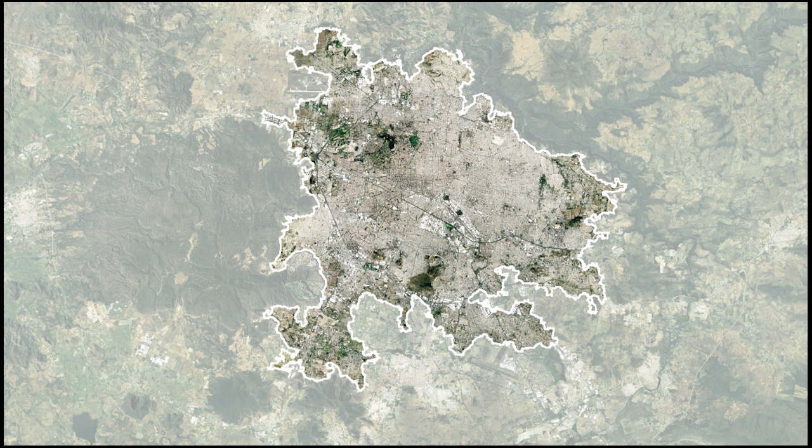Between worlds: approaching strategies to integrate urban fragments. We start with the simple word fragment, an irregular piece or a broken line, a disconnection between urban spaces, between realities and experiences of a city like Guadalajara.

The cultural importance of the city lies in being one of the metropolises with one of the richest cultural movements in America, with a vast agenda that exploits the attributes of the city, being the center and headquarters of international artistic encounters and renowned audiovisual exhibitions.

On the other hand, Huentitan, which is the only non-urban area, is the natural heritage of the municipality, with its ravine, fauna and flora.

Architecturally, the importance is in its more than 2,000 colonies that reflect the European style of the 19th century with its colonial renown, and in the modernization that the technology and trends of the 21st century have brought.

It is worth highlighting Guadalajara's rich biodiversity and culture, and the development it has had in recent years.

Guadalajara's urban growth started within the settlement around streams, and further, it adapted to the Spanish colonial grid. After understanding how the city developed, we could conclude that the last 20 years of settlement expansion had taken place towards La Barranca and its surroundings.

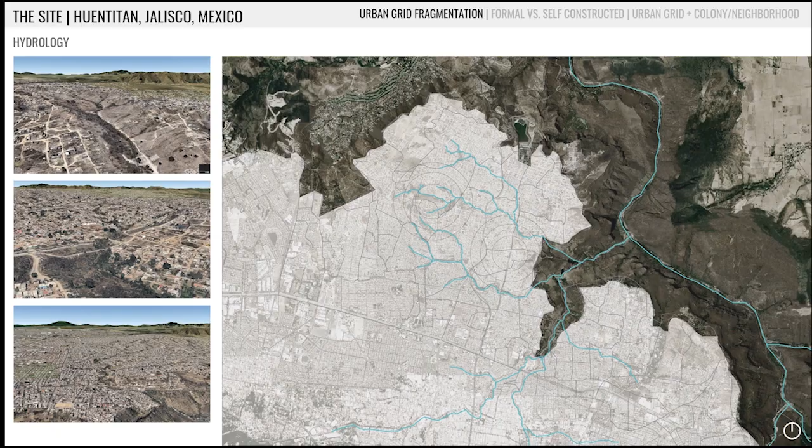Throughout the complex hydrological system of the place and following the path of Huentitan's main river, one of the settlements that we know today as Huentitan and Zapopan was developed.

In these places, the most relevant topographical accident is the barranca. Nevertheless, it is also possible to identify a sequence of topographic variations through the Zapopan sector that characterize the place.

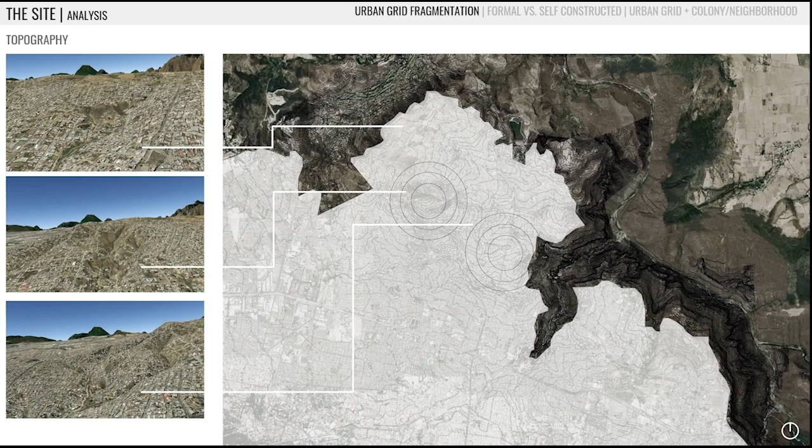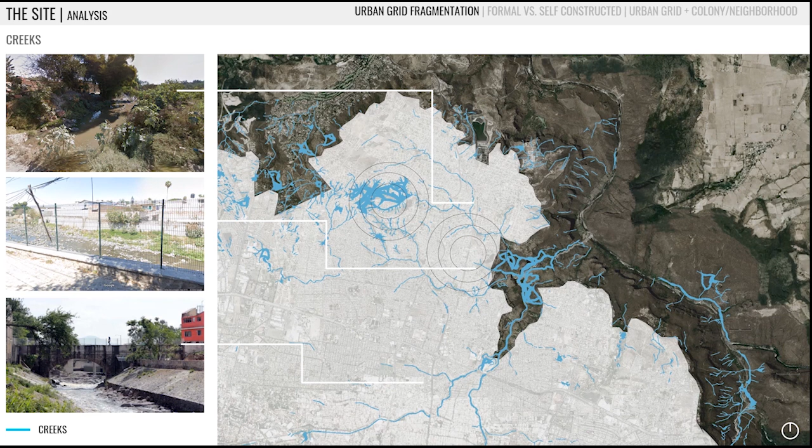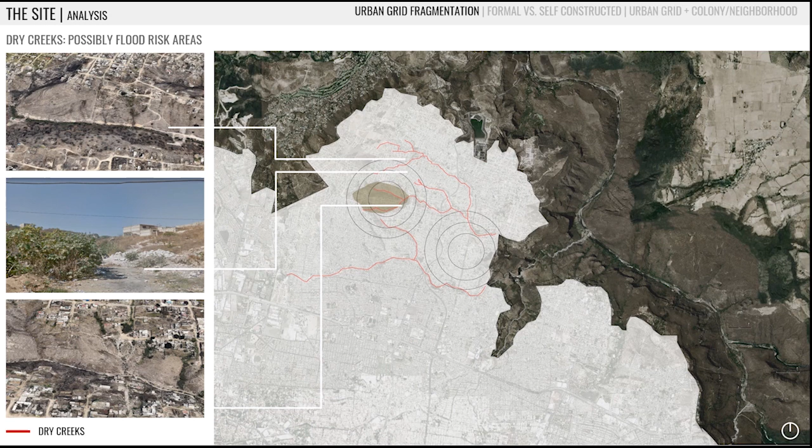Another important characteristic is the presence of streams, associated mostly with risk zones and at the same time as communication barriers. In addition to those that have a constant water flow, there are also dry streams where in certain sectors they are used as communication routes, but then they are exposed to possible floods and landslides in the periods of rain.

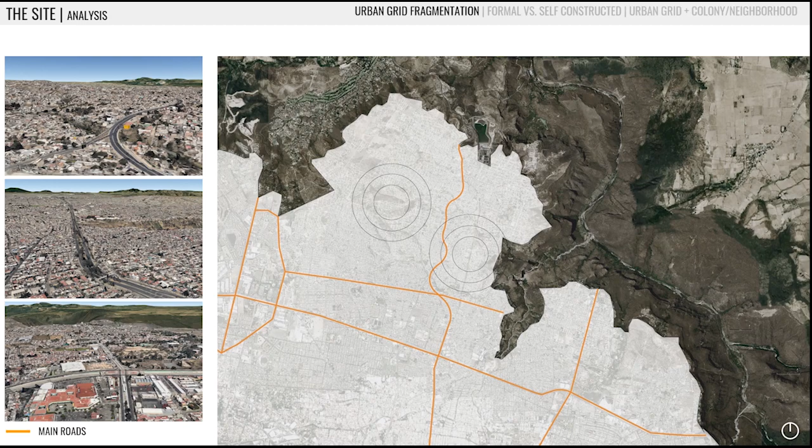We continue the analysis of the main roads and how they cross over the sector. Additionally, the main metropolitan green spaces are identified, such as the zoo and the Centinela Forest.

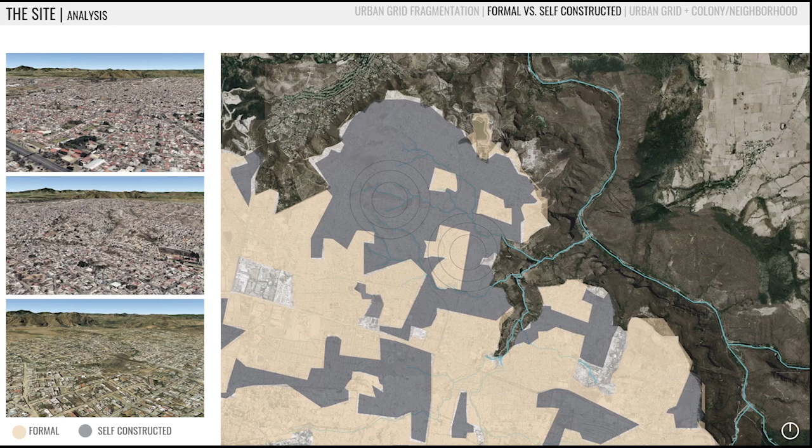Lastly, analyzing the actual urban grid, we figured out that it doesn't correspond in its entirety to the conformation of the colonies. So it was possible to identify a coincidence which includes the ruptures within the grid and the limits between one colony and another.

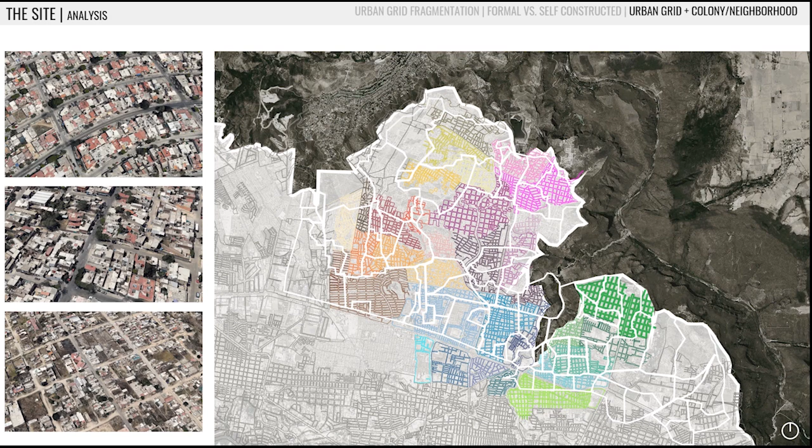The ruptures have become barriers within the community, creating boundaries and isolating the different colonies because of the lack of connection. So for us, these empty lands are considered as the potential areas for a network of connections that bring the barranca into the urban grid and integrate the different elements that conform the city.

A reading of the metropolitan scale allows us to select testing areas that can help us enhance the replicability of strategies and obtain the integration between the urban fragments, mostly the colonies and programmed and self-constructed settlements.

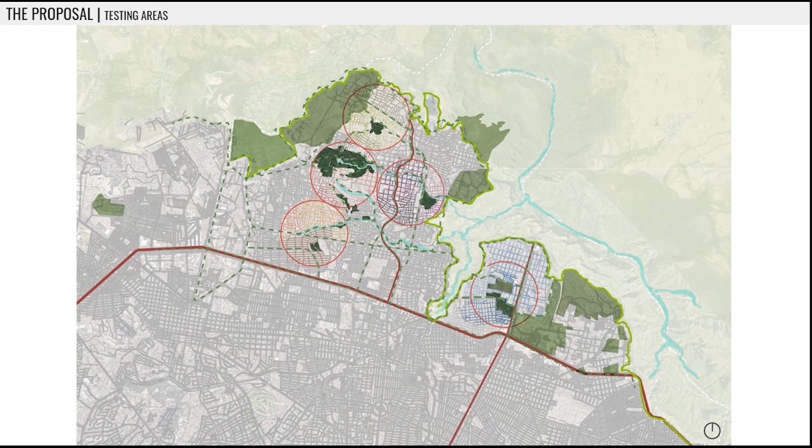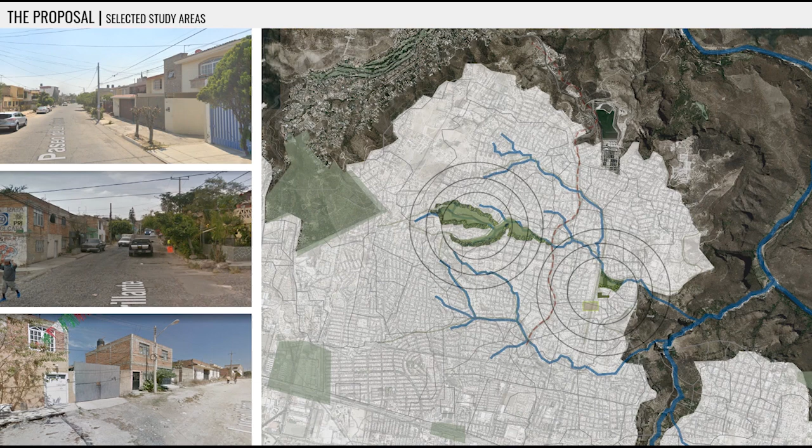Specifically, in Zapopan, we selected the testing areas in which are present dried creeks, abrupt topography, and infrastructure that act as boundaries between two sides of the city.

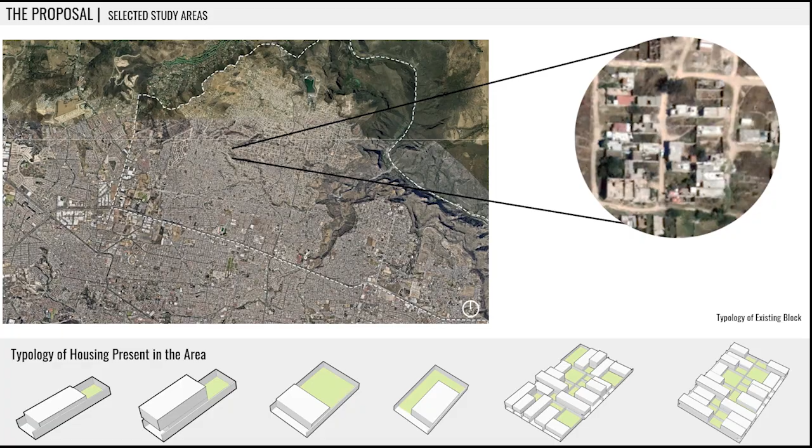Within the sector, we identified the following housing typology and block conformation, predominating the distribution with backyard and separation by dividing walls. In order to reconnect these city fragments, there must be a developed connection system, including transportation routes, corridors between urban green spaces, and creek rehabilitation, trying to keep a holistic view within the urban grid and the rupture integration for further replicability.

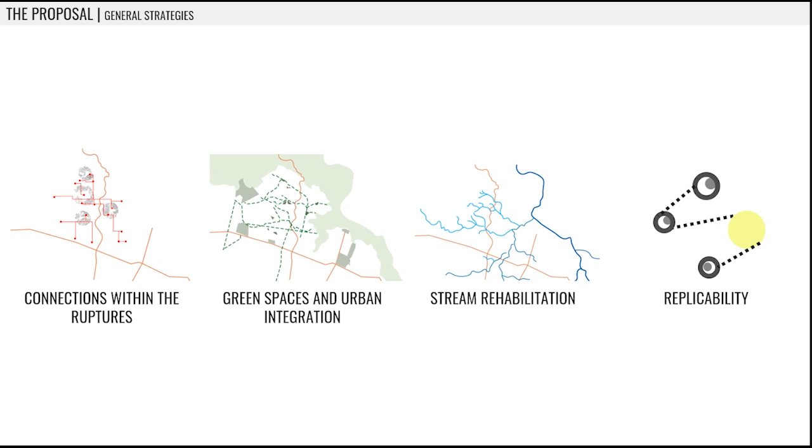The green armatures analysis allows us to identify the main intervention areas. For areas that appear to be more consolidated, central transformative fields were proposed to improve the quality of the settlements and boost the economy and tourism of the region.

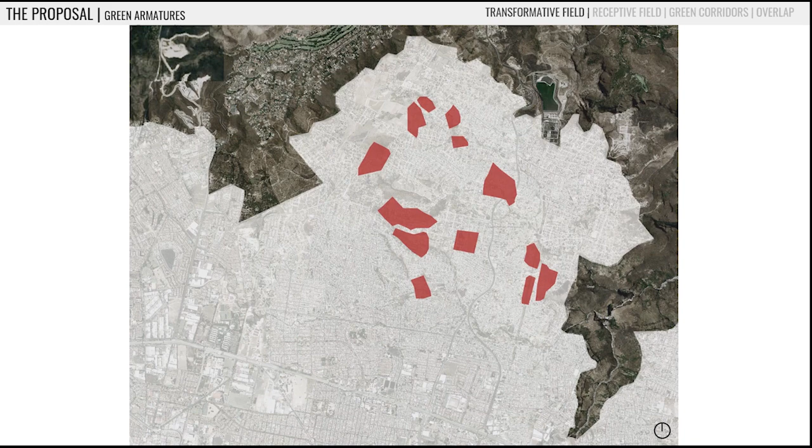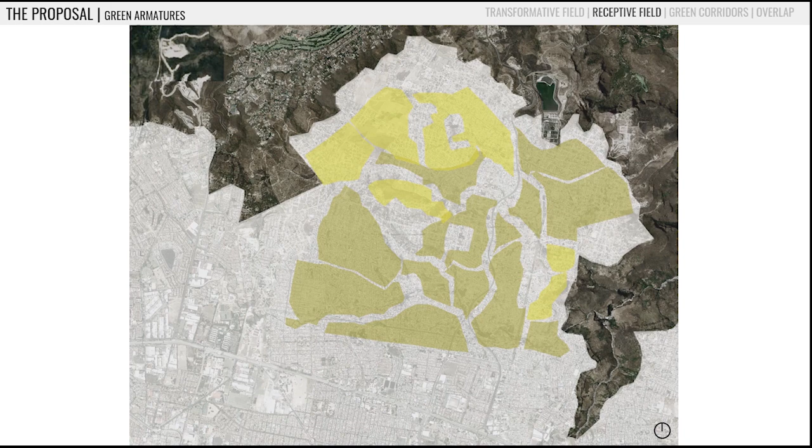On the other side, receptive fields were proposed in less consolidated areas, including actual empty lots, to allow the new settlements to come in. These fields were all integrated by a network of corridors that are meant to attract activities into the area.

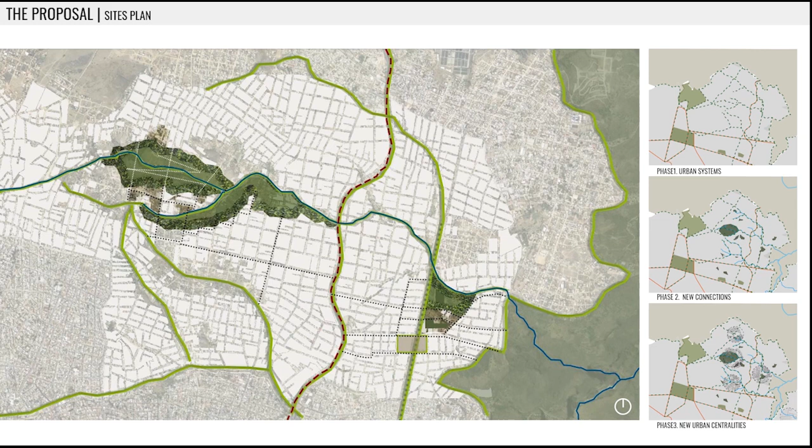Once the study areas have been defined, it is thought to take advantage of the natural character of both sectors and use it to generate new connections to integrate the vegetation of the canyon to the rest of the city.

The first intervention sector is characterized mainly by the presence of topography and former creeks that are currently dry and tend to fill up within the rainy periods, turning these lands into possible risk zones for self-constructed settlements.

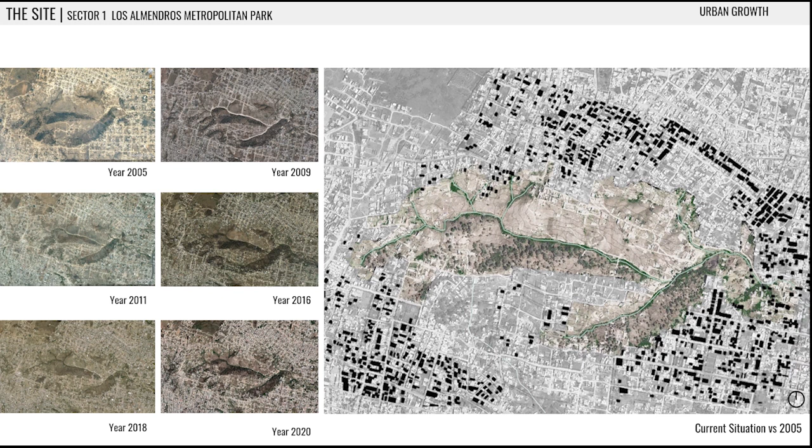This is why we decided to study the urban growth of the site, in which we can appreciate that since 2005, self-constructed settlements have started to appropriate the empty space despite the rough terrain and the presence of vegetation.

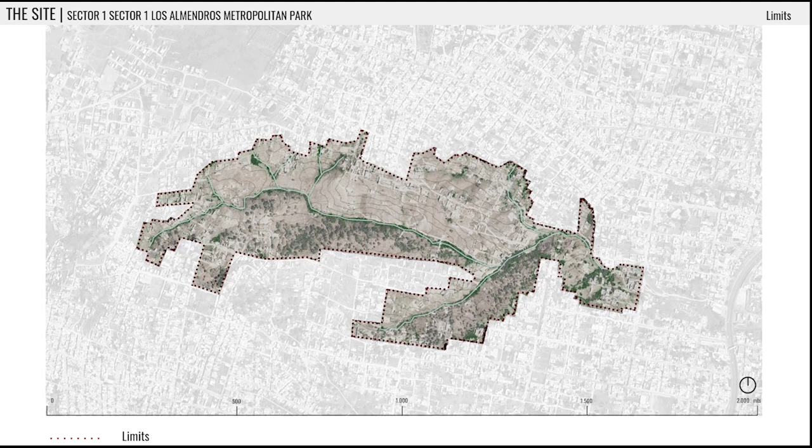To comprehend better the extension of this rupture, we proceeded with a series of analyses where we could identify the limits of this fracture. Here we can appreciate the vehicle roads that surround the site and the pedestrian paths that were made spontaneously by the locals over the years.

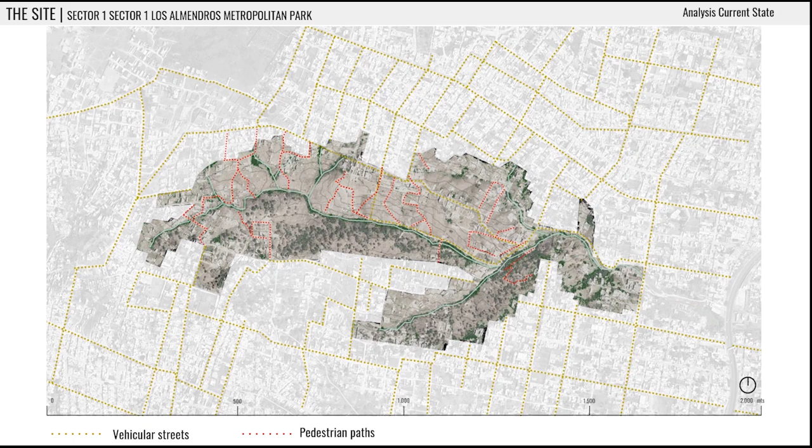It's because of this analysis that we noted that there's an intention to connect both sides of the canyon. However, the paths that currently exist do not allow such connections.

After defining the limits of the rupture, we've categorized the green areas into green protected areas inside the rupture and semi-occupied areas, realizing that there was a greater presence of vegetation on the south side of the canyon.

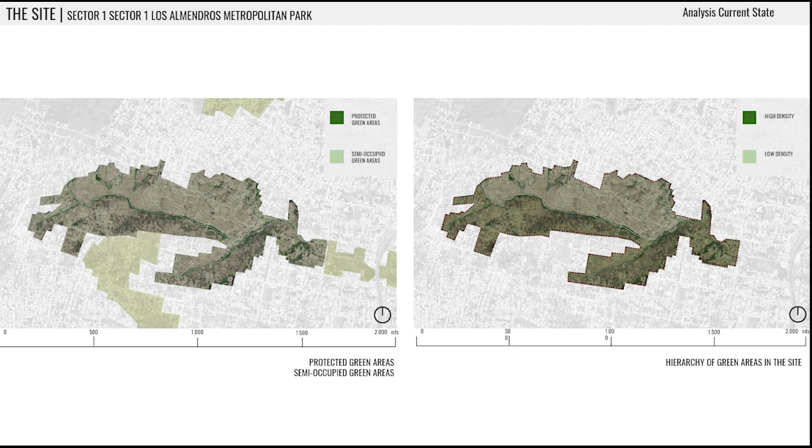Finally, we identified the main existing connections and thus noticed that some of these roads branch into the rupture, penetrating the boundaries between the city and the protected green area.

In this sense, we can also appreciate that the growth of these settlements stops abruptly in some areas, but in others it slowly merges into the canyon.

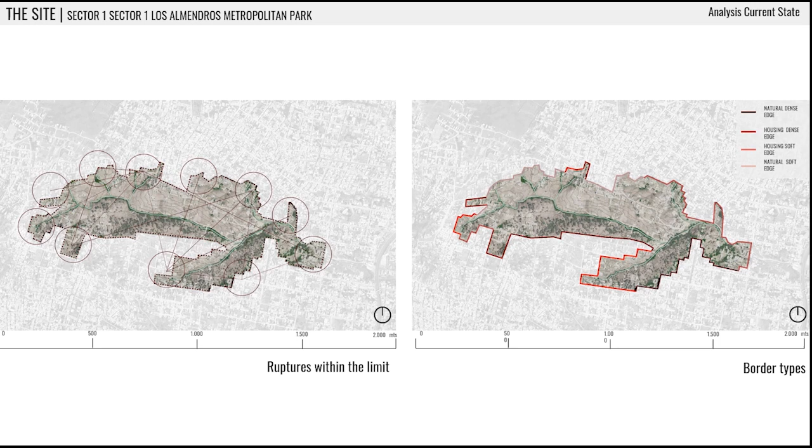This way, defining soft limits and hard limits, leading us to identify a sectorization that qualifies the unused space and thus the urban relations. This way, the proposal is structured on the definition of green areas.

We seek to become a mechanism through which protected areas can be created, allowing creeks and land to be rehabilitated.

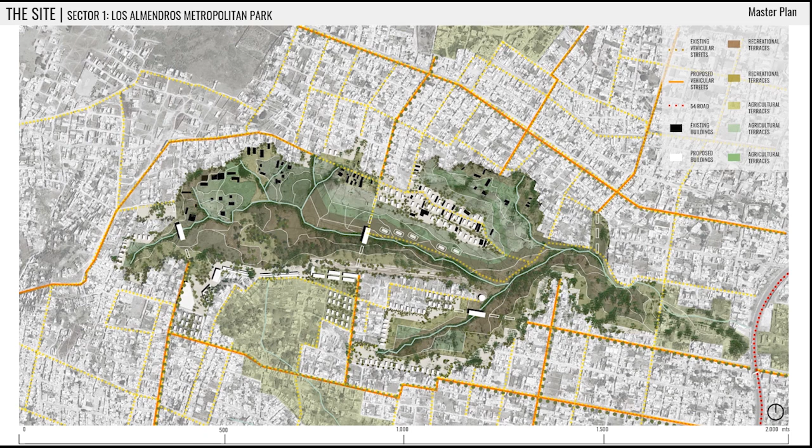This way, Los Almendros Metropolitan Park will allow the connections between the colonies and its surroundings, through different types of connectivity systems which allow it to integrate to the park within its limits as well as with the rest of the city.

Through green and mobility corridors, the proposal seeks to integrate the vegetation and the nature to the rest of the urban grid, taking advantage of the empty lots to define a new organization in which self-constructed housing can be developed.

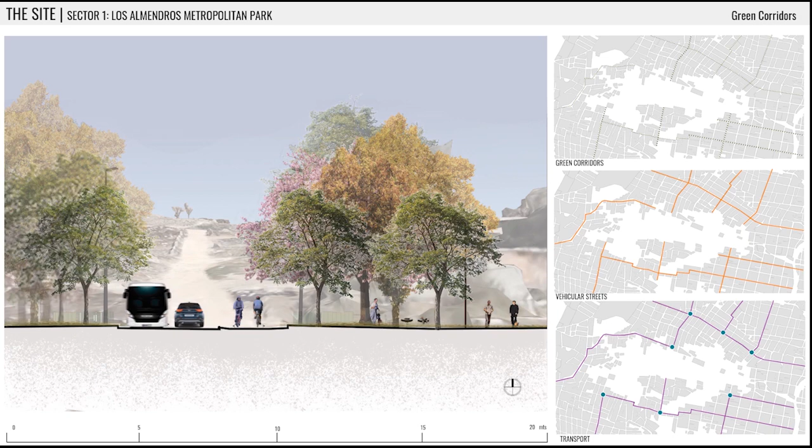The proposal seeks to integrate the existing housing typology by establishing an order that allows the creation of new self-constructed housing in the site, focusing on the integration of the urban grid with the limits of the rupture and the creation of new urban facilities that can promote the social and cultural integration.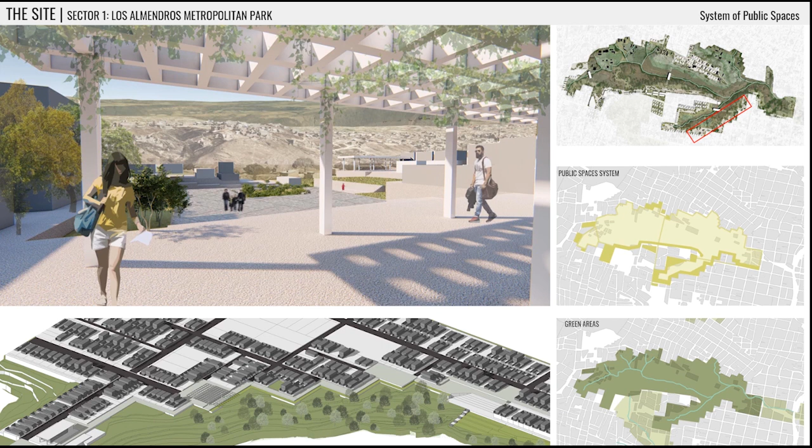The more defined limits are taken as an advantage to create intermediate scale zones between the homes and the new metropolitan park, which allow the community to enjoy spaces that are more friendly to the family environment and to the everyday life.

Then, in the less dense limits, there is the opportunity to establish new urban facilities of an economic and cultural nature that, in addition to serving the community and serving for its integration, they become a transition between the metropolitan park and the urban grid.

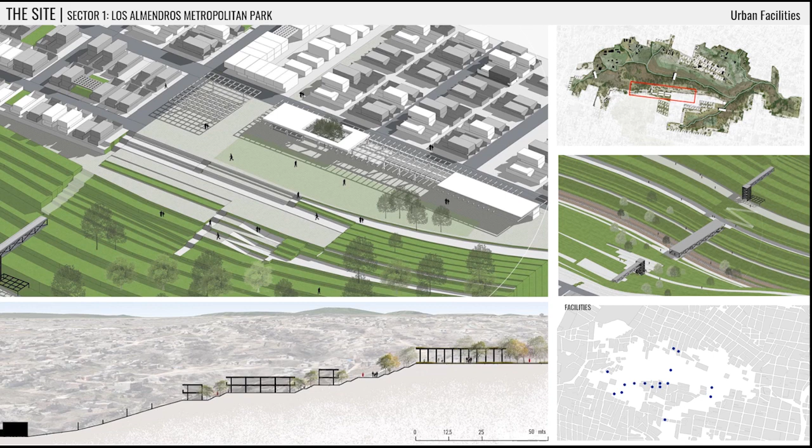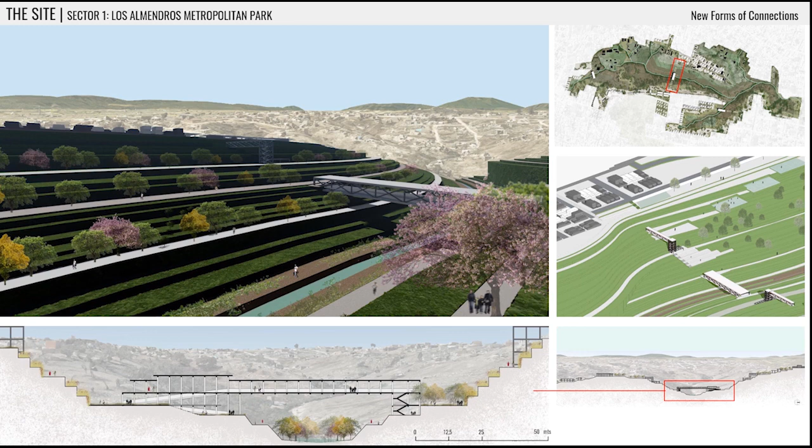Because one of the main objectives of the proposal is to generate new forms of connection, a new system of bridges and stairs will be created to connect both sides of the canyon, where people were already seeking to travel. Likewise, these elements are not only provided as connectors, but also as urban facilities that provide services within the park for the community.

Because of its topography, sloping land is proposed as agricultural terraces, to boost local production and reduce the growth of settlements in an uncontrolled way, by including public spaces and urban facilities for the community, consolidating a transitional space between the existing housing and the canyon area.

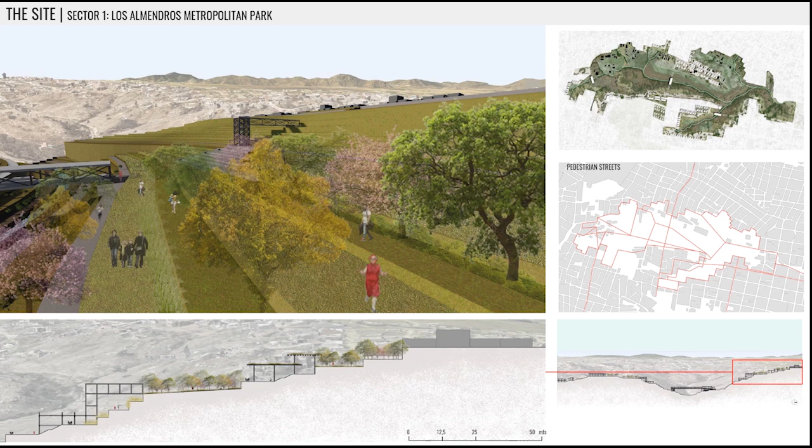In search of more effective connections, a structure that generates faster connectivity is proposed, prepared with facilities, formalizing a more dynamic route that alternates terraces, paths, and slopes.

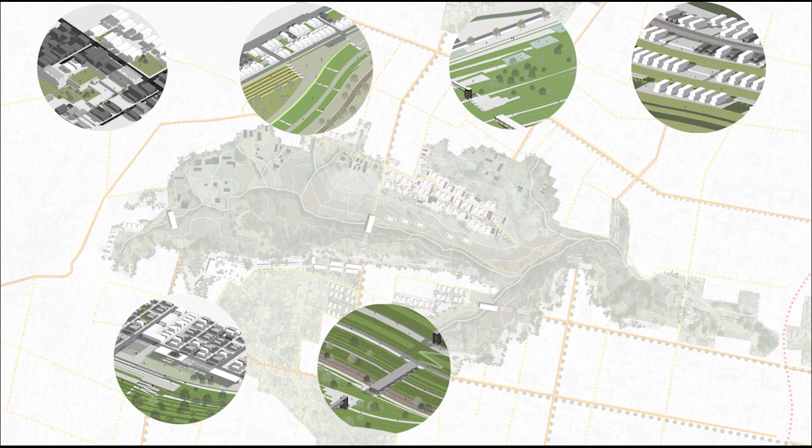Finally, the typologies used for the conformation of Los Almendros Metropolitan Park that seek to integrate the fragmented spaces within the city are shown, redefining the interstitial spaces and thus generating a new centrality.

The second intervention sector we named the Zapopan Lineal Park. It is characterized by the presence of the aqueduct, a creek, empty lots, a neighborhood center, church, vecinal sport field, and the limits within the border of the barranca.

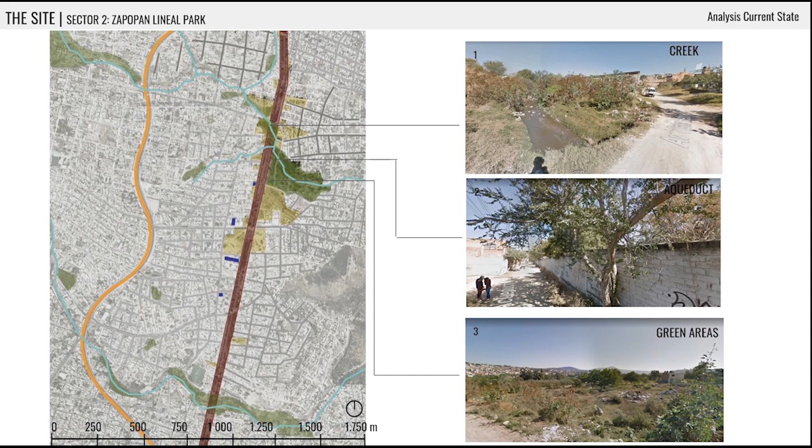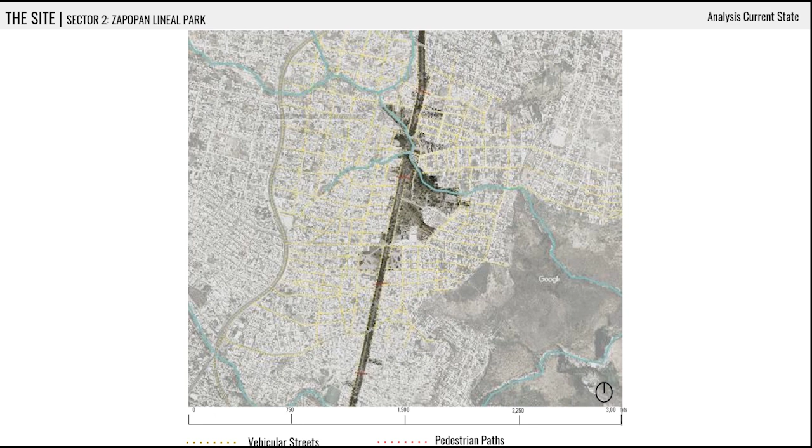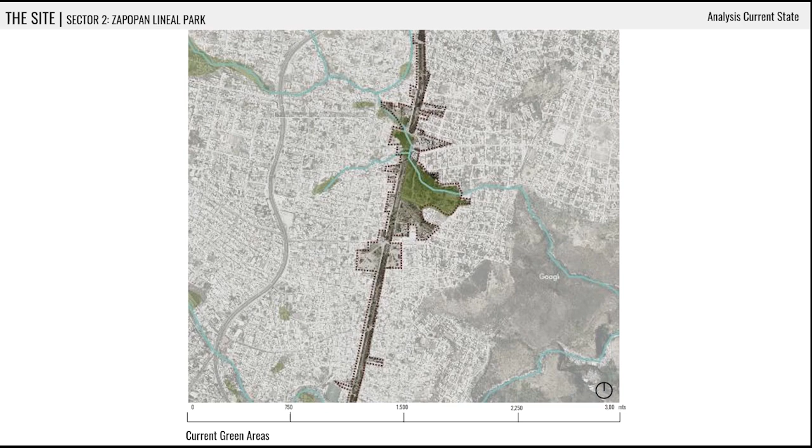We proceeded with the sector analysis starting with its limits regarding the aqueduct and the empty spaces. Then looked at the road system and the current transversal connections, and also located the pedestrian ones, observing some existing pedestrian passages that cross east-west. Both were overlapped, and we watched how the current green areas surrounding the infrastructure that divides both sides of the sector is directly related to a creek.

Also, it is important to analyze the ruptures within the limits, characterized mostly as empty lots with subused features, some near the stream and others bordering the aqueduct, and the border types, so we could identify which were soft for further intervention and which were hard.

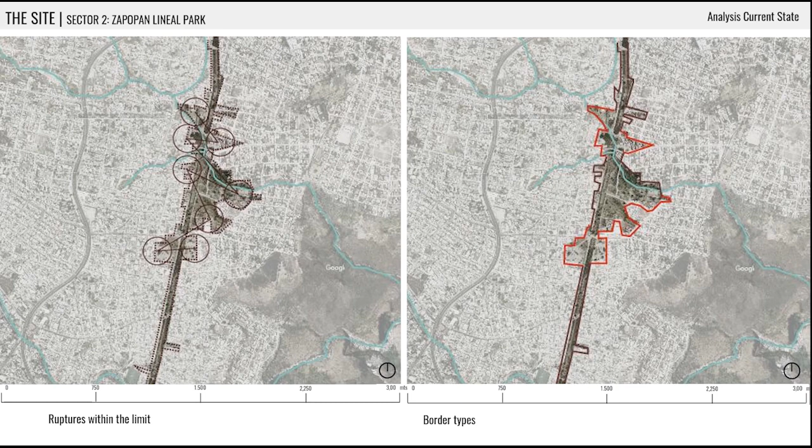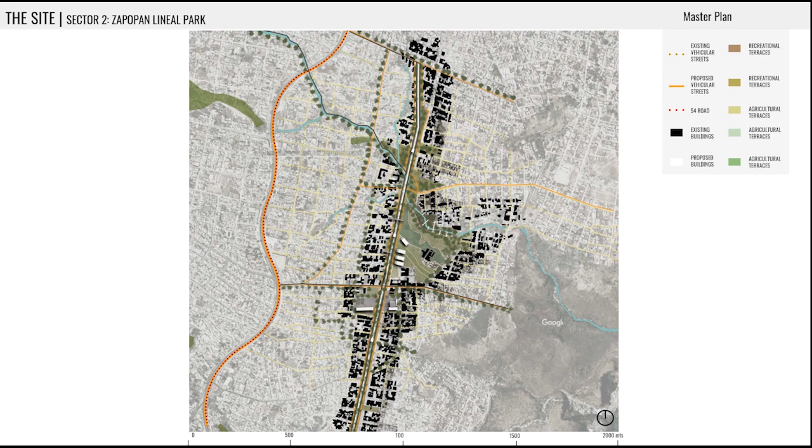An approximate sectorization with new housing typology, productive terraces, and recreational terraces were proposed. Also, there is proposed urban facilities such as a sport and ecological park and a cultural node. For housing typology, we proposed a productive housing node and, at the sector limits, a series of housing reformations according to the sectors already shown.

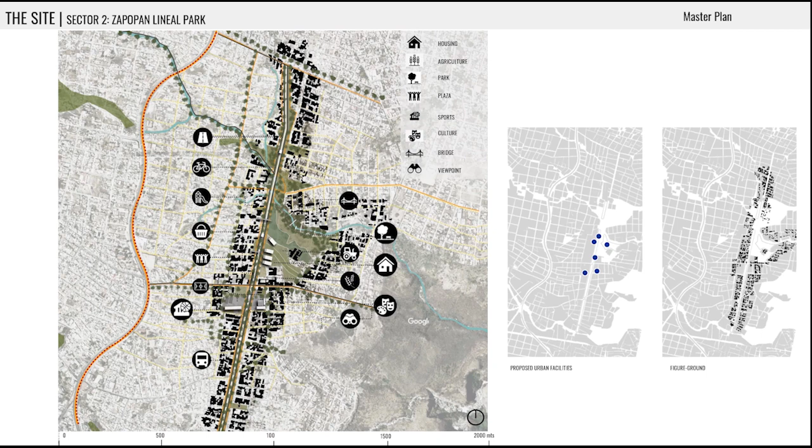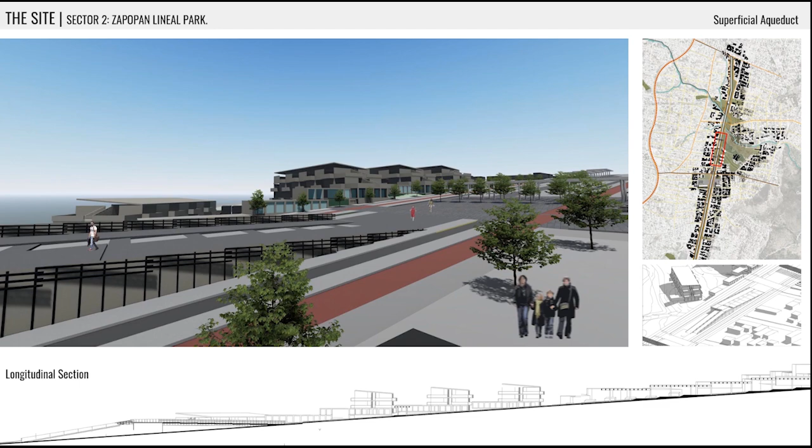We proposed for the above-earth aqueduct structure an outside structure which will contain ramps and other urban stairs, creating new paths towards a city viewpoint. For the parts where the aqueduct stays underground and is surrounded by walls, we propose a whole new corridor that integrates the east-west dynamics within the sector. This connection will be done every 450 meters.

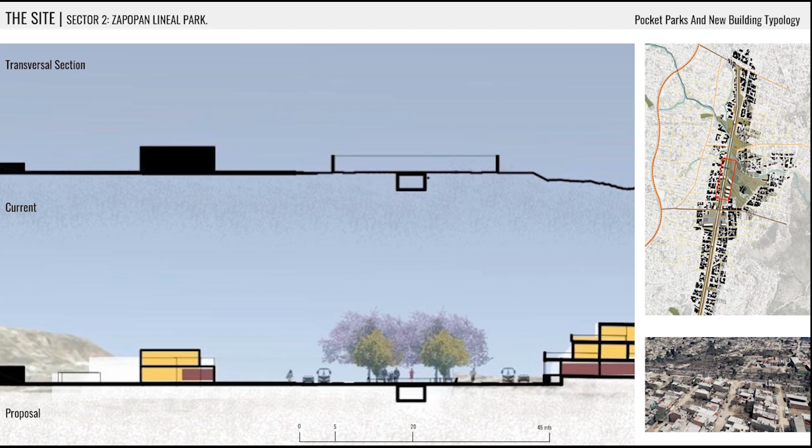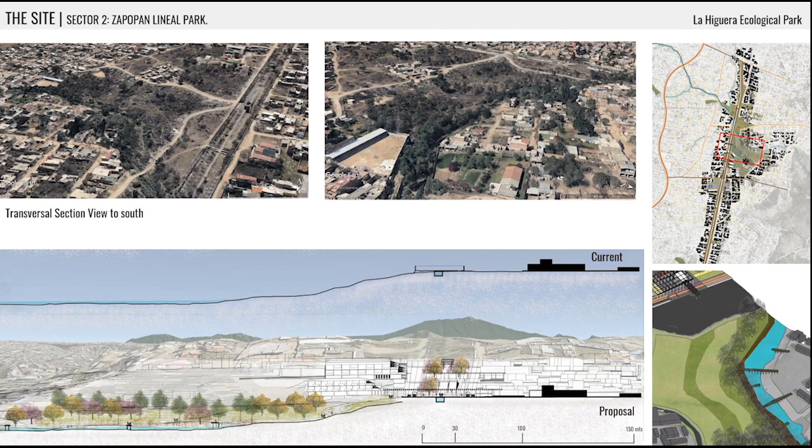For in-between spaces, there will be high pedestrian walkways, and both will be aligned to the vehicle road system. Then create an ecological park which will contain a tree-dense area, a children's recreational zone associated with an existing kindergarten, and a humid park regarding the creek.

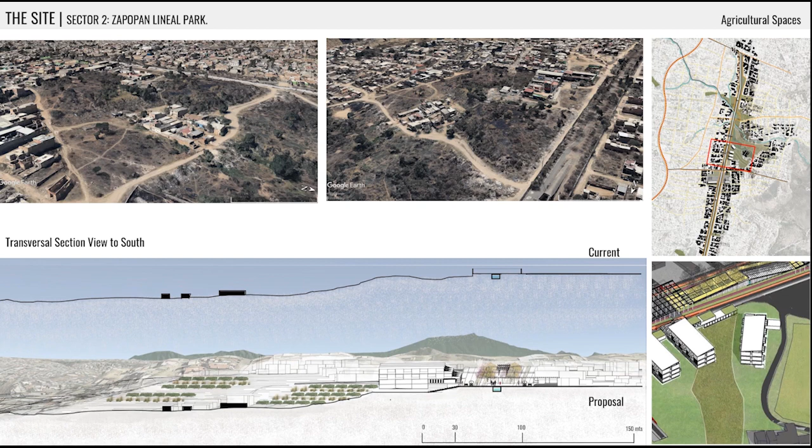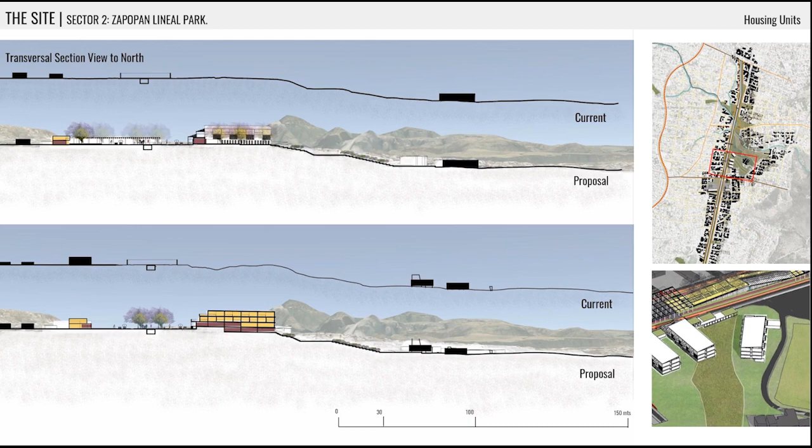Mixed-use housing is proposed, which will have a community productive area to create attraction zones for the new development. A commercial border will be proposed as a transition boundary between the lineal aqueduct park and the existing urban occupation. Crossroads connections will be created that go towards newly created pocket parks for community-scale use, providing the community new social and cultural dynamics.

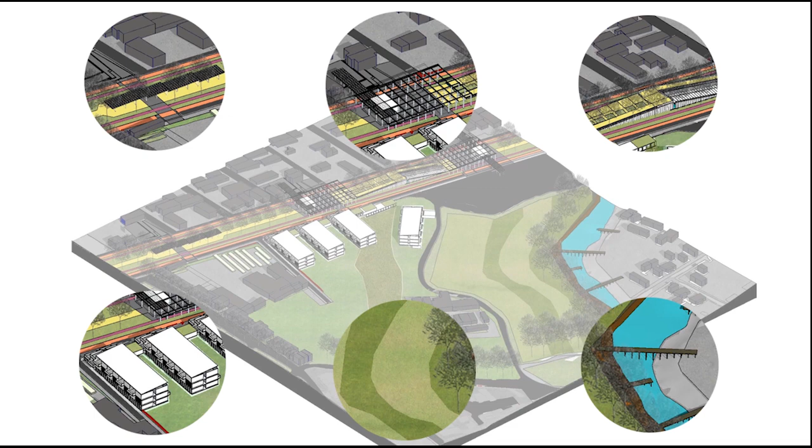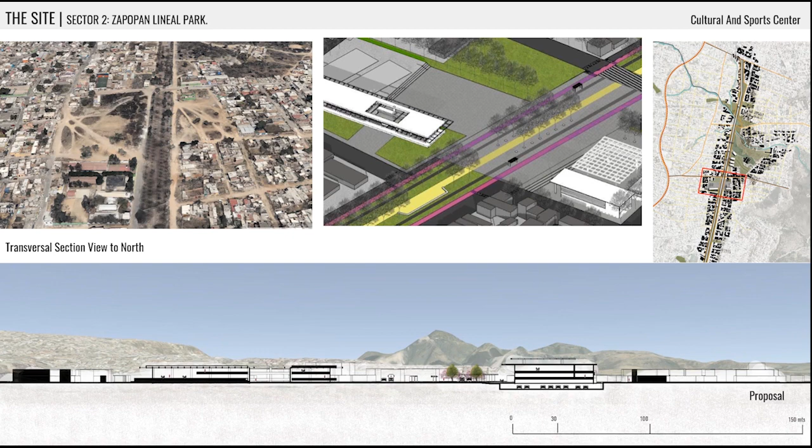Creating new public spaces for the city and enhancing the green space integration might create a great change within the place. Finally, the sport cultural node will consist of a covered sports center, open-air courts, an auditorium, workshop space, and a public square, along with a public neighborhood space, a neighborhood market, and a craft market, creating a sequence of spaces that blends both sides into one.

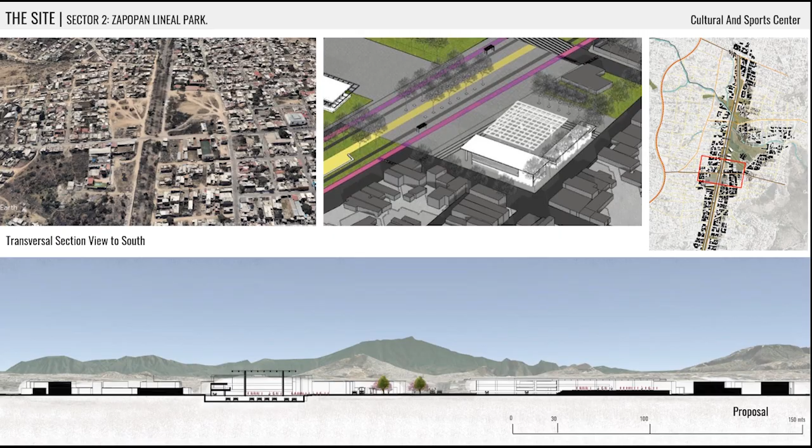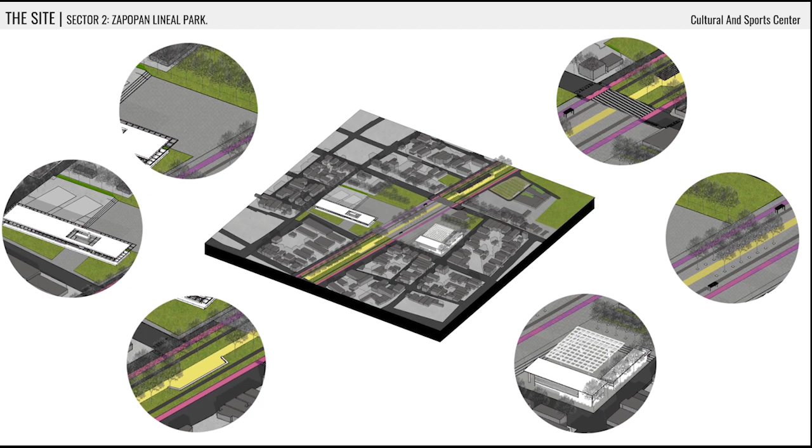A sequence of green corridors, new mobility systems, and cultural recreational activities are given to the community for their improvement and social well-being. Within the proposed strategies for these two sectors, we arrived at the conclusion that they can be replicated in other rupture sectors that match each analyzed condition, creating a new connectivity system that revolves around new centralities in the site.

Finally, the proposal seeks to integrate the fragmented spaces within the city, defining two base study sectors to later generate typologies that can be repeated under different conditions, taking the fragments as an opportunity instead of hiding the breakages and repairs.

They claim themselves as an inherent part of each sector, which only beautifies it and testifies to its capacity for transformation. The ruptures are part of the city. They make it unique and define its identity.